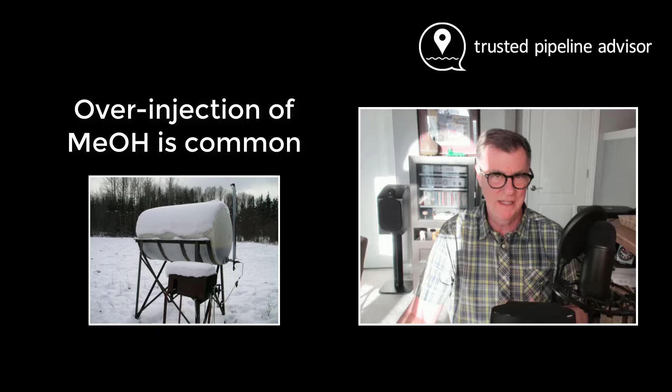Our focus has been on methanol optimization since 1994, when the industry first seemed to realize that excessive overinjection of methanol was a contributing factor to an increasing number of top-of-the-line corrosion failure events.

We recognize methanol is not a pharmaceutical-grade product. It has trace levels of contamination and impurities, such as low levels of strong organic acids, such as formic, hydrofluoric, and hydrochloric. In pipelines with excessive injection of methanol, droplets condense and rain within regions along the pipeline and cause a chemical corrosion attack within the top hemisphere of the pipeline.

If the methanol rain is sustained in these localized regions, the corrosion rate can cause a pipeline failure typically within 1 to 2 years of exposure, 40 to 50 times faster than the corrosion associated with normal produced fluids.

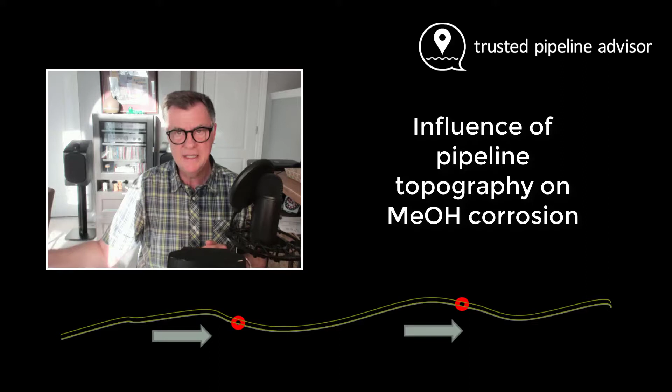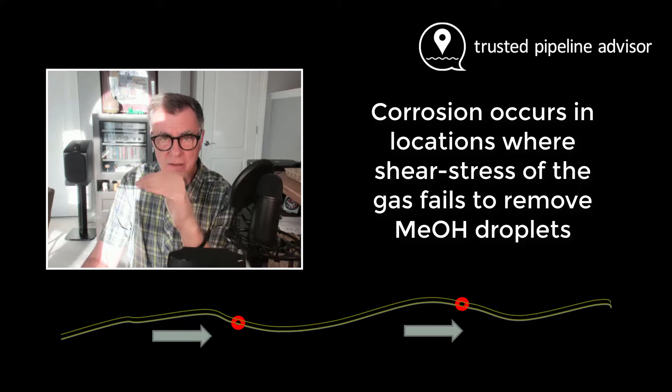When overinjection of methanol causes corrosion, the failure typically occurs on a slightly declining section of the pipeline following a region of moderate inclination. The failure occurs here because it is the region along the pipeline where the shear stress of the flowing gas stream applied onto the pipeline surfaces is weakest. The flowing gas stream in these situations is not capable of ripping the droplets away from the pipeline surface, and the corrosion mechanism is sustained.

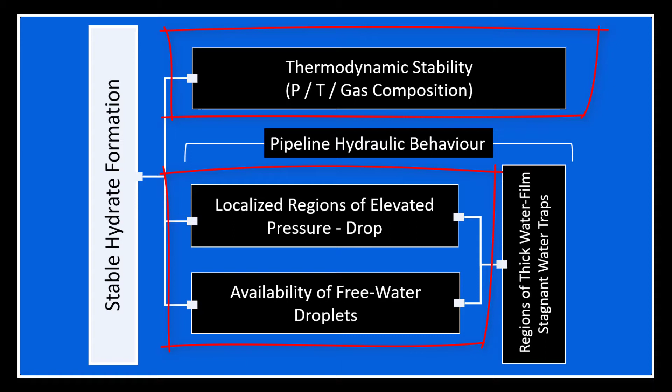We recognize hydrates are complex. We explain them by referring to a hydrate triangle. Three conditions must be in place for a hydrate to form within a pipeline. Unlike most calculators, we consider both a thermodynamic tendency and whether the flowing conditions within the pipeline are appropriate to support the kinetics of the hydrate formation triangle.

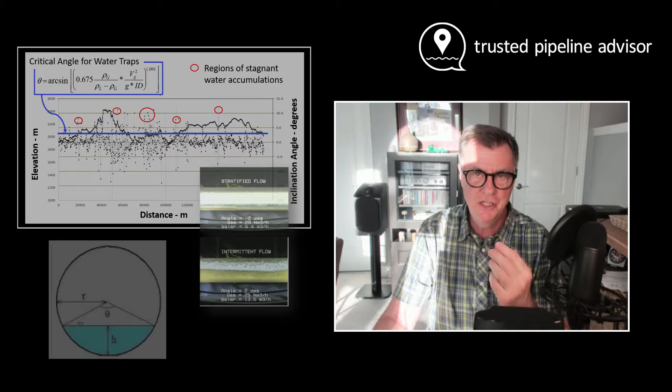We calculate if regions of thick water film accumulation are likely to occur within the pipeline. Regions of stagnant water accumulation are essential to support hydrate formation because they create localized pressure losses and generate a microhaze of free water droplets, two ingredients absolutely necessary to support the formation of the hydrate plug.

This is a schematic that provides a summary of how we execute our projects. We gather pipeline physical and operating data and characterize the properties of the water film transport.

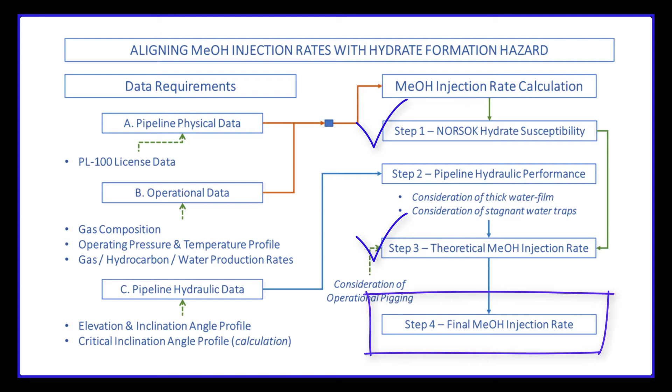We then calculate the hydrate formation temperature using the NORSOK model. We use the Hammerschmidt equation to establish theoretical methanol injection requirements necessary to suppress the hydrate formation temperature below the lowest pipeline operating temperature. Because we calculate the water film behavior, we know how much in situ water resides within the pipeline at steady state conditions.

By overlaying the pigging frequency onto the operating conditions of the pipeline, we establish if operational pigging is an aid to hydrate prevention. This is an overview of the first page of our hydrate and methanol optimization calculator.

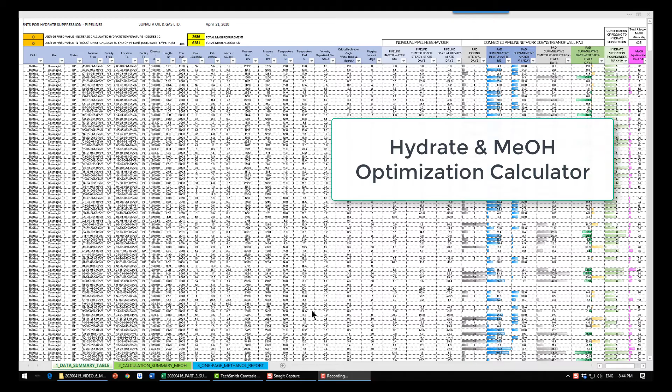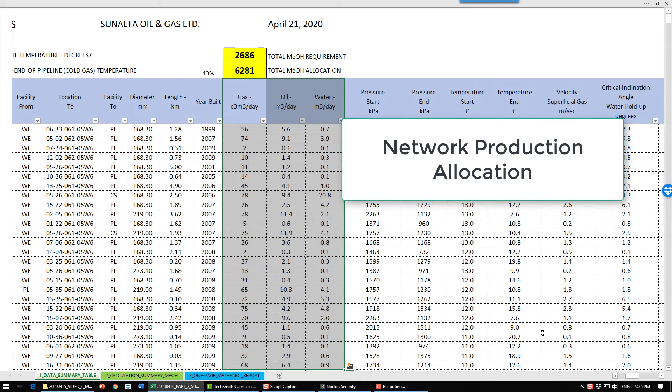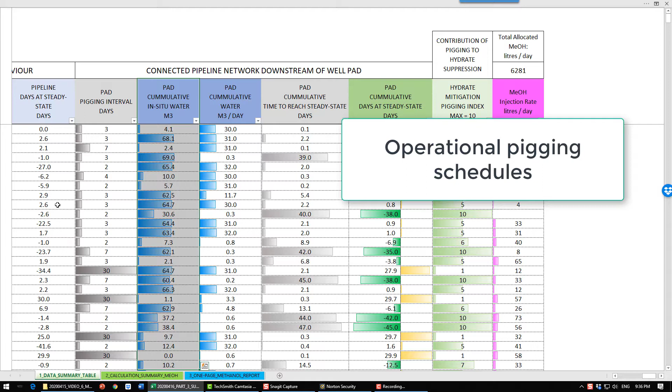It provides a summary of the pipeline static information, production allocation volumes of oil, water, and gas, pressure and temperature and gas velocity profiles, a list of the pigging intervals being performed on each pipeline by field operations teams, and the in situ water volumes for each pipeline should steady state operations be achieved.

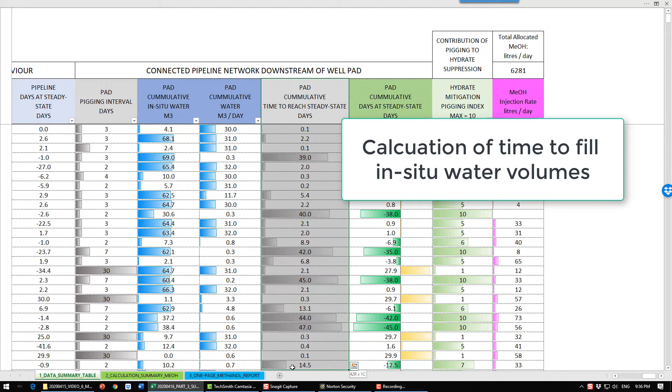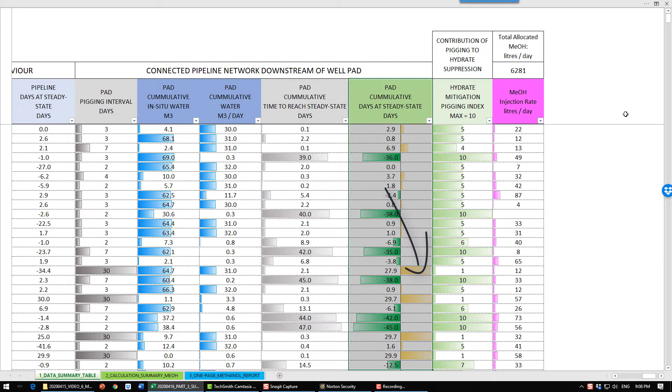By considering the total daily water volume, we calculate the days to reach steady state operation. This column is a summary of the benefits of pigging to the prevention of water from reaching steady state. The negative number indicates the days at which the pigging frequency prevents steady state from forming, and the positive numbers indicate the days in between pigging where the steady state of water fill is actually achieved.

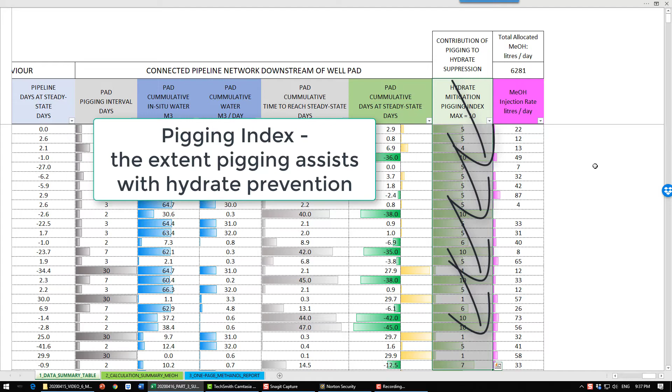The effects of operational pigging on disruption of steady state operations is translated into a pigging benefit index. The higher the index, the more likely the pigging frequencies being applied by field operations are preventing hydrate formation. This allows a comparison between the required methanol and the actual methanol being injected by field operations.

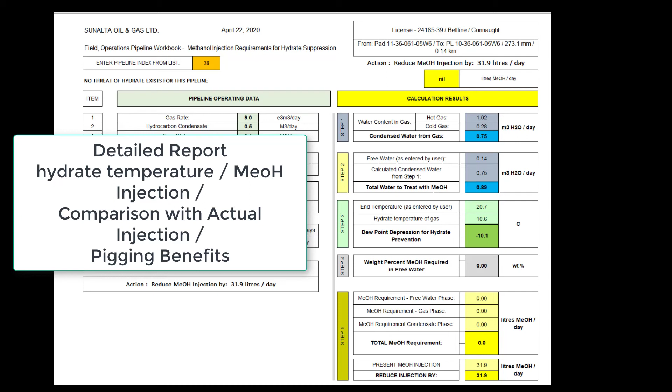There is a feature where the user can select an individual pipeline and receive a detailed engineering assessment calculation report.

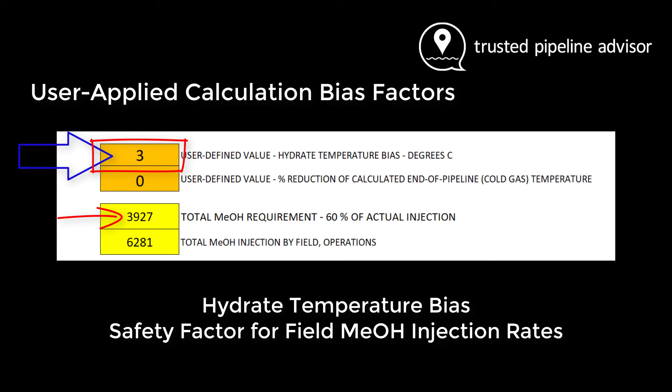The user has the ability to apply a global default or a bias onto the calculated hydrate temperatures in order to provide a safety factor or a sensitivity on the overall methanol requirement. In this case, application of a positive 3 degree bias on top of the hydrate calculation temperature results in an increase of 20% of field injection requirements for methanol.

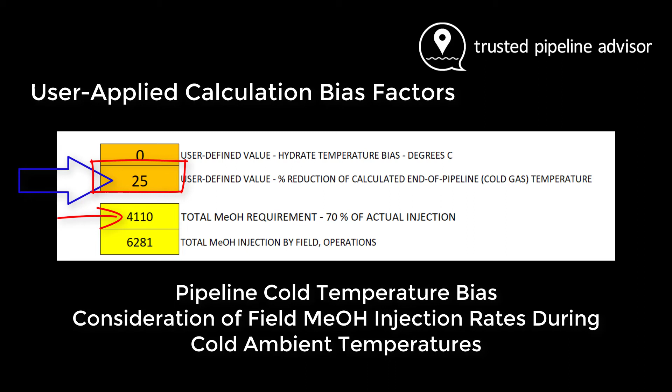The user can also make a global bias adjustment to the calculated cold gas temperatures for each of the pipelines for situations where there are extreme cold ambient temperatures. In this case, a 25% factor, or a cooling of the gas by 25% of calculated temperature, results in an increase of 30% demand on field injection of methanol.

The owner has the opportunity through the data validation sheet to override any of the calculated values and to make adjustments as changes occur in the future to temperature, actual field injection of methanol, to operating pressures in the well field, and making adjustments to the production allocation.